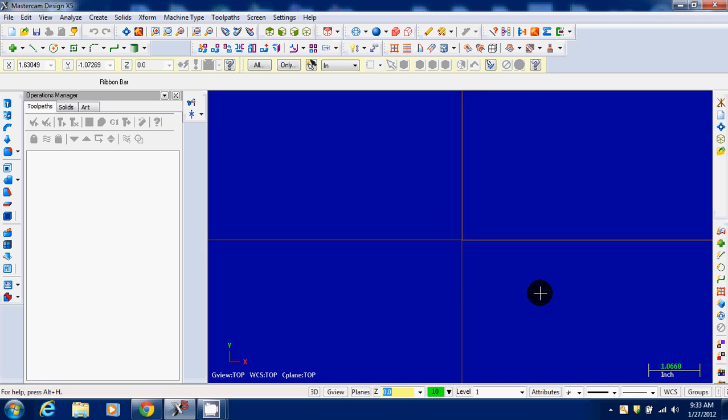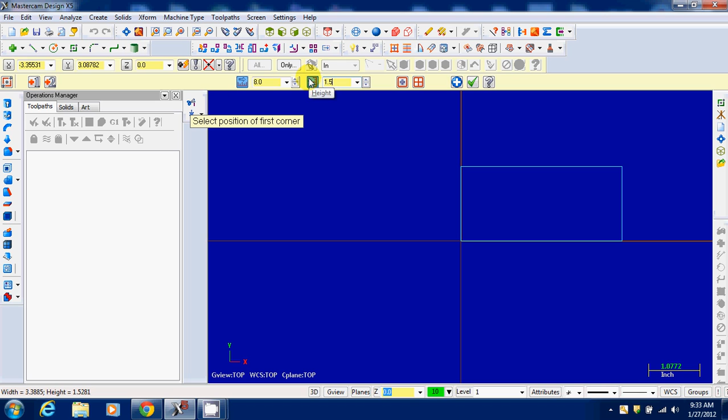First thing I want to do is draw a rectangle. So I'm going to go to Create, Rectangle, select position of first corner right on the origin there, and then move up and to the right. I don't care how far. Come up here to these two spaces. For your X direction we're going to go 8, and for your Y direction 1.5, and hit the green checkmark. Now our material went off the screen, so we can come back and hit this blue plus looking thing to fit it to our screen, and then roll out.

Next thing we're going to do is look at that in isometric view. So we hit this button right here, the open square. That's looking down in the Z direction this way.

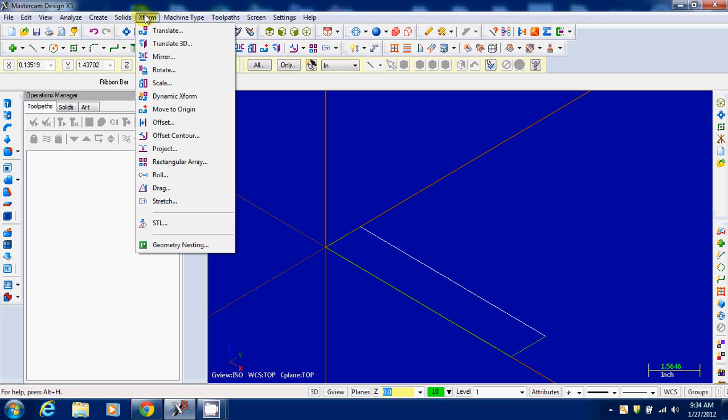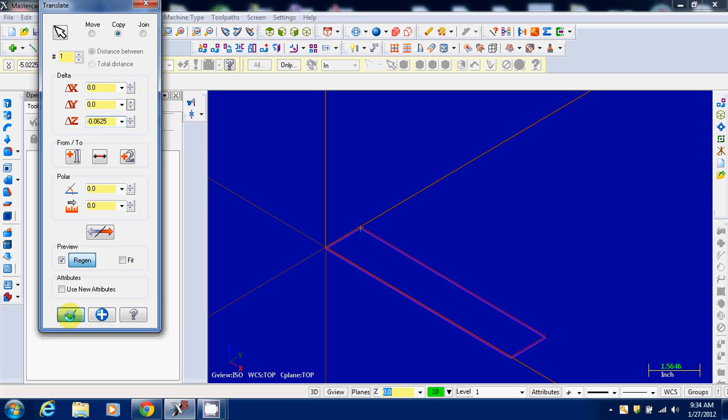We need to go ahead and extrude this so that it's an actual solid piece for our name tag. So we're going to go to Xform, Translate, and it says select items you want to translate. We're going to make a box around all of that. Once we've made the box, hit the green button up here to end selection, and we can change some things. We're going to change the Z, make it negative 0.0625, and hit OK. And you can see we've now added a bottom layer, so we've given some thickness to this piece.

We can go back into the top view. We can hit fit if we need to. We're going to add some letters now. So go to Create, Letters, you get a text box here. I'm going to write down my name, however I'd like to see it, all caps or lowercase, whatever, and pick a font.

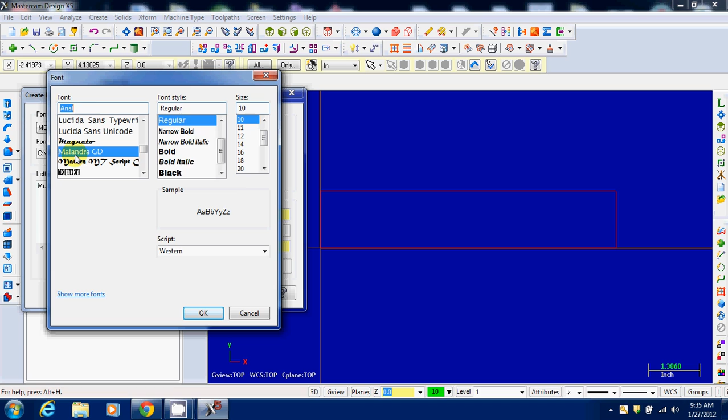Tons of options here. It'll give you some idea of what's available. Some will work better than others. Some will cut better than others. It kind of depends, it's going to be a trial and error thing. I'm going to try this one right here. I'm going to leave it at regular, and I'm going to set this up just the way it is. So let's see what happens.

Hit OK. My height, I'm going to change to 0.875, and I'm going to hit a check mark. It says show me a starting place. I'm going to just drop it right there. Alright, so I've got my name in place, ready to go.

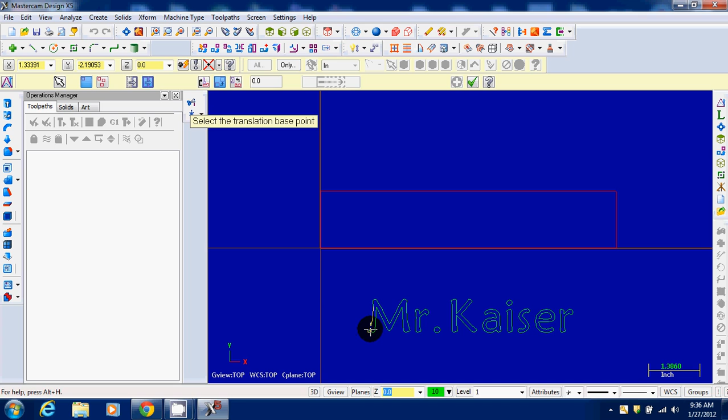Next thing I need to do is move it into my actual area I'm going to be working on. We'll go to Xform, Drag, select entities, that's all of this. Green button. Point to move it from, we'll pick the bottom of the M, and slide it over and get it centered top to bottom and left to right, and click. Green check mark locks it in, and I can erase the old one.

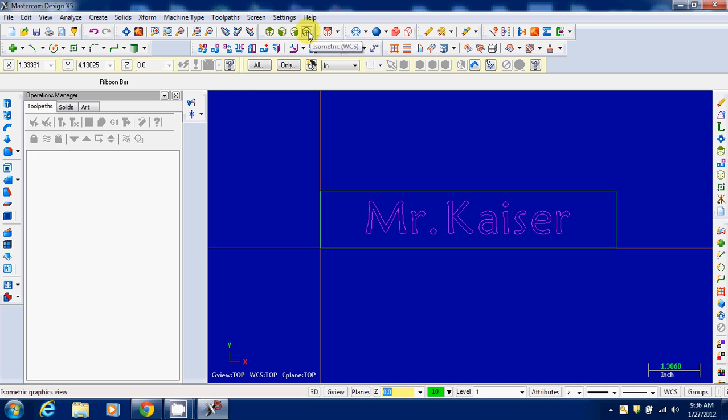Alright, now that's set up. Next step, let's leave it here for a second. First thing we do is hit Machine Type, Mill, and load in this mill right here, the generic Haas 3-axis mill.

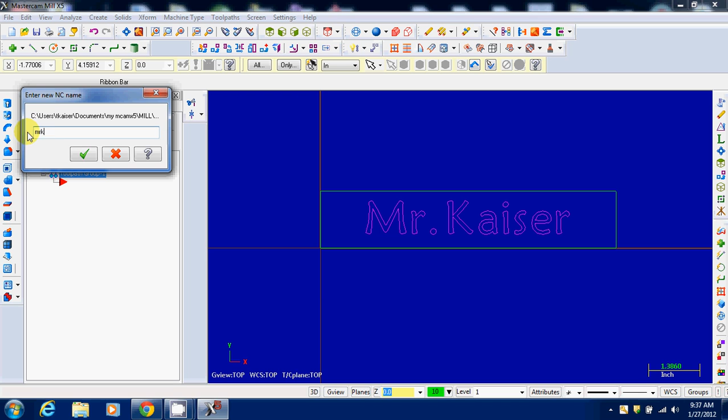Once that's done, we can do a toolpath, engraving. It's going to ask you to pick a name to save it by. I'm going to call this one Mr. K. And hit save.

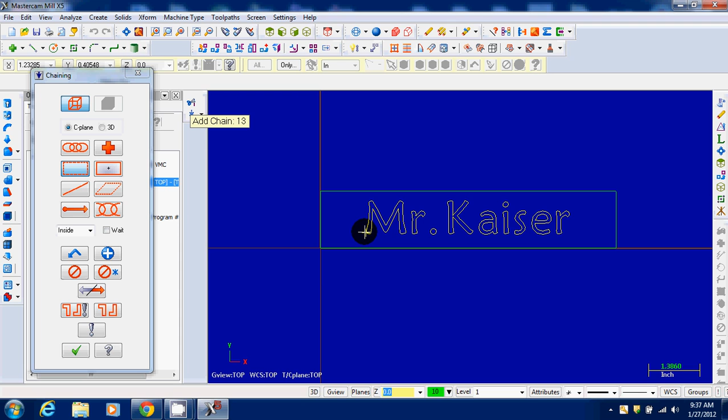Now in this case we're going to switch the chaining from 3D to C-plane and change the chain to a window. I'm going to select this window right here of just my letters. A start point, bottom of the M, and hit the check mark.

So to give you an engraving window, we need to change some things in this window. We're under the Toolpath Parameters tab. Tool number 6, length offset 6, diameter 6.

These should all be 6s right there. Engraving Parameters, check the first box. Change the 2 to a 0.25, absolute. Retract plane 0.25, absolute. Feed plane 0.1, absolute. Top of stock 0, absolute. Depth needs to be 0.03, absolute.

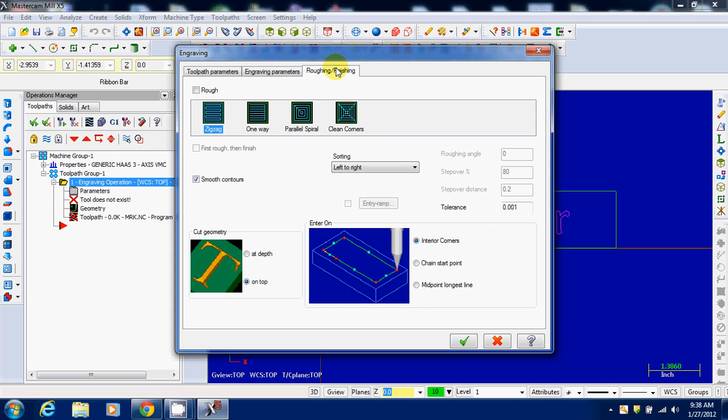Rough and finishing, we don't need to do anything. Hit the green check mark. It tells us that our current top of stock value is invalid. We need to figure out what our stock looks like. So hit OK to get out of those errors.

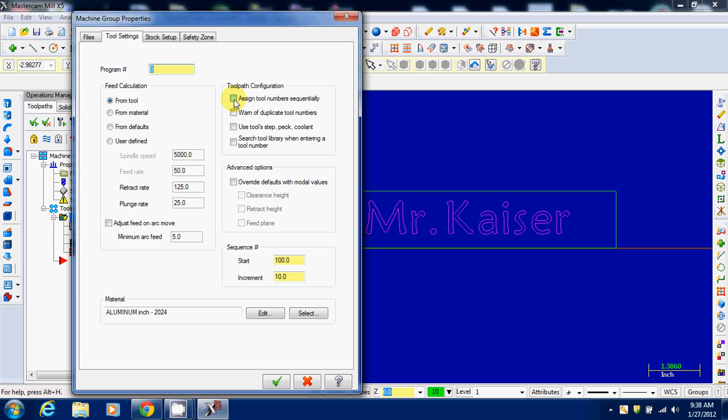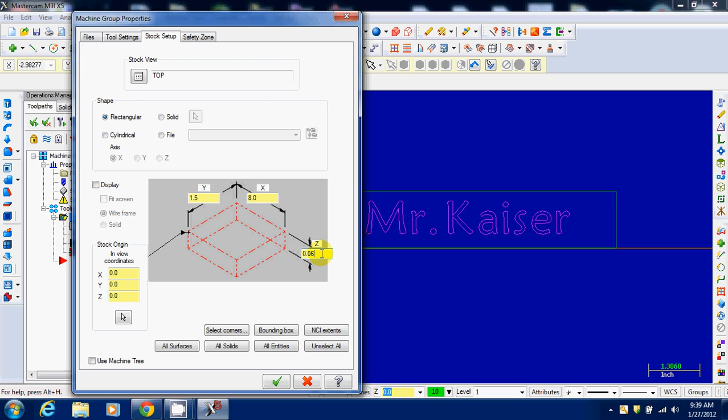Head down to Properties, Tool Settings. We can hit Assign Tool Number Sequentially and Warn of Duplicate Tools. Stock Setup is where we have to make our changes. Everything up here stays the same. Down here, we're going to move our origin point to the bottom corner. We're going to say our Y is 1.5, our X is 8, and our Z is 0.0625. And then I hit check mark.

I think this should clean it up. We hit the green check mark with the X, and then we can hit the regenerate.

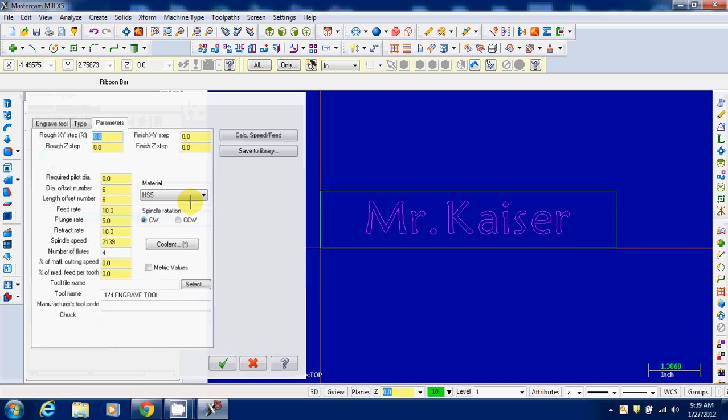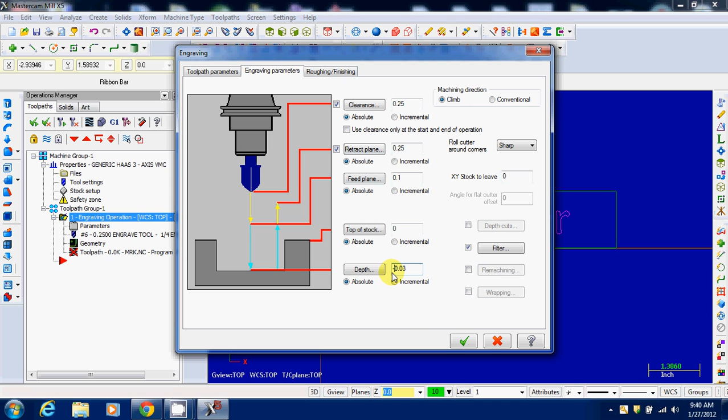Safety zone is good. Parameters, engraving parameters, this has to be a negative number right there. That was under engraving operation parameters. Tool parameters were fine, engraving had to be negative. Check mark. Let's try it again.

We got it. Alright, so let's take a look at this here in preview mode. That's this button. Hit the check mark. Whoops. The play button. And there it is. Green check mark.

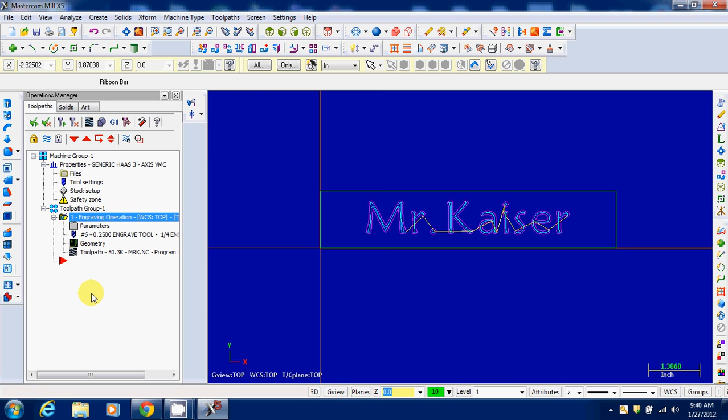You're done. Hit the G1 button to post your G code. You can leave all this stuff in place. Hit the green check mark again. You're going to get your series of codes. Verify here that it says T6M6, and then that your Z is negative 0.03.

Once that's done, you can go to File, Save As. Mine saves as Mr. K. I'll be saving this to my E drive, which is what's open. Hit Save, and you're done.